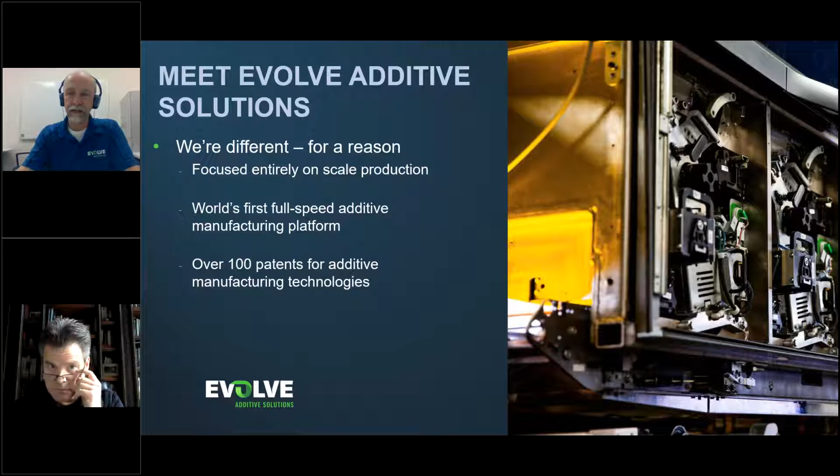So a little bit about where we are today. In 2017, we were founded when we completely spun off from Stratasys, and in 2018, we received a first round of funding and shipped our first alpha system. Today, we're on track to deliver production systems in the early 2021 timeframe, and we're taking orders today and looking towards the future for Industry 4.0 on our roadmap for factory integration. So we've really designed our roadmap and our systems around full-scale production.

So Jeff, any questions about Evolve at this time? Or... let me turn my mute button off.

So Andy, maybe you could share how mature the technology is at this juncture. Yeah, that's a great question, one we get asked quite a lot. Since we look like a 2-year-old startup, how could we have this kind of technology? It's actually getting to the core of the presentation. We'll go through some of that, but it's a very mature technology for a small startup.

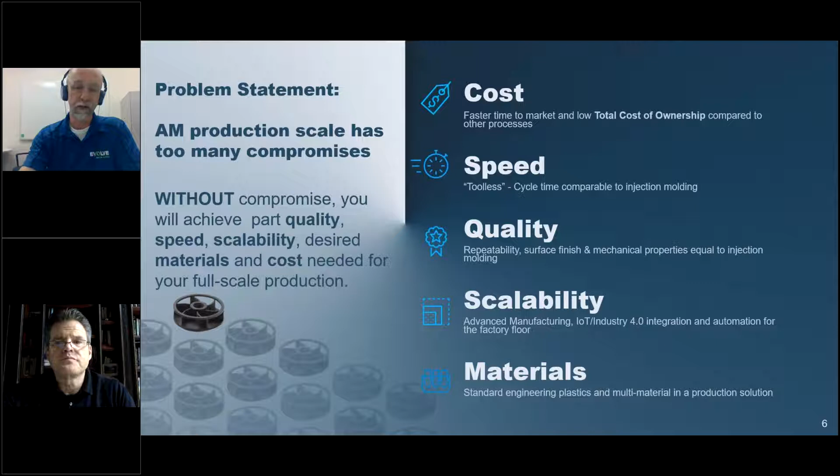As I mentioned before, we've really designed our process and system from the ground up, thinking about production. That's a key difference, and that really gets us to the SVP production platform, our solution with a ground-up design to overcome these compromises. It's the scalable volume production system, the Evolve SVP. We have a number of development systems, all leading to this final production system. I can say we can deliver mass customization, just-in-time production, and unmatched quality all at the same time. But it goes beyond the 5 key pillars that are core challenges to the additive manufacturing industry at production scale.

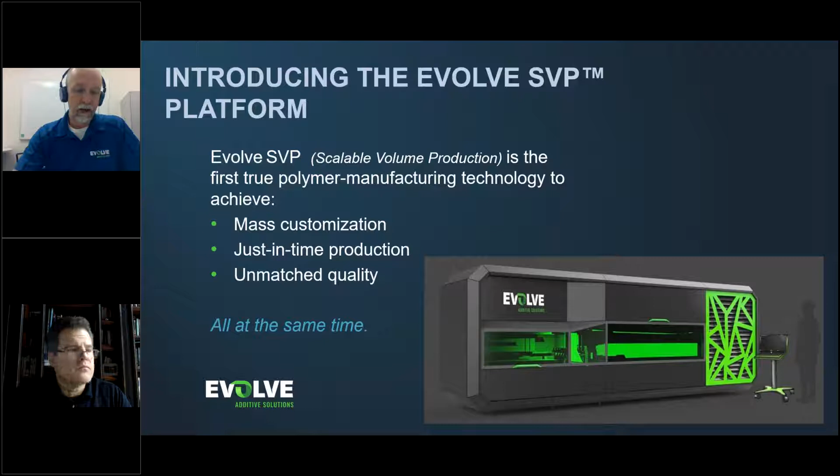So we're going to talk a little bit more about the additive technology STEP, and let's dive into that. In many cases, this is a process similar to injection molding on a small scale. What we've added is an electrophotographic process. STEP is selective thermoplastic electrophotographic process. We're taking technology that's been used for many years in a 2D production environment, and we've brought that into the additive manufacturing environment.

Really, our first challenge is to get you to forget all that you've seen about other additive technologies. When we're at trade shows discussing this technology, there are a lot of questions about whether it's a derivative, what is this? It's really a new process—not powder bed, not MJF, not SLA, not SLS, not a derivative of any existing additive technologies today. Many of you might have seen us at FormNext, and this was a big hurdle in understanding how we're different. We're not derivative, we are different.

STEP is selective thermoplastic electrophotographic process, as I mentioned. And the core of our technology is the electrophotographic imaging and deposition.

This is really well understood in the 2D printing industry for high volume printing, and we've adapted and added to that. We create a 2D slice of a part with part material, support, and maybe other materials all in one image layer. Then with heat, pressure, and cooling, fuse it all onto the build. This creates a fully dense part with isotropic properties in all directions.

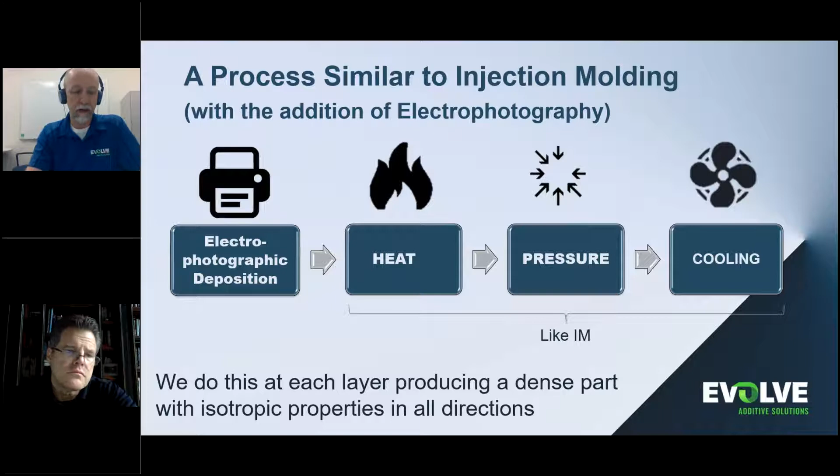There's really a good video that shows this. We had some trouble getting the video to run over the webinar today, so you can check it out at this Vimeo link. But we'll go through some of the key points of the process. I wanted to spend a few minutes on that.

Step one is the electrophotographic section, or the print engines that use our part and support toner. It's essentially a Kodak NexPress printer. So in a 2D high volume printing environment, we're using that in a modified version. 5 print engines allow us to create parts with up to 4 materials.

So you can think of, in the 2D process, you'd have cyan, magenta, yellow, black. In our process, we're taking toner materials that we've tonerized the material. You could think now you can print black, blue, ABS, PIBA, nylon. You print all of these as an image, all at the same time.

So we can do this where part and support are put down all at once. So that's an important point there too.

Andy, quick question — are you doing a layer of support and then build and then color, or maybe explain that process in a little more detail?

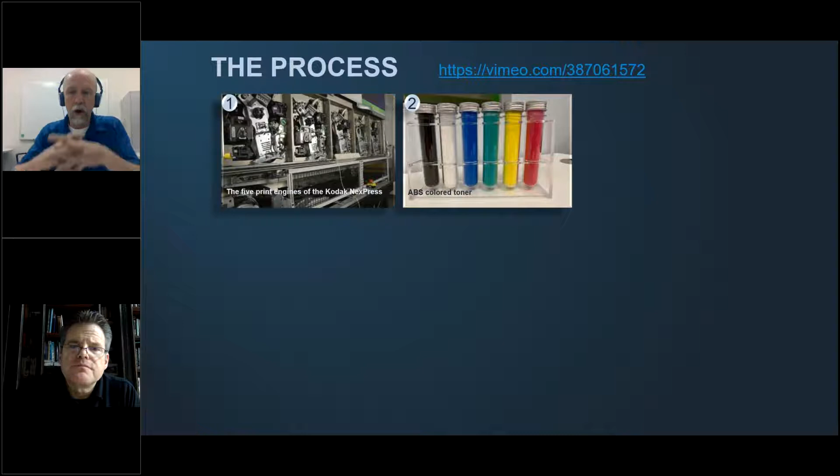Yeah, it's a really good point. So we're imaging all of the parts of the support and the material all at the same time. If you were to print a black and a blue part next to each other with support material, that's all going on one image, and then that image is transferred all at once.

So we'll get into that a little bit here. The slide or picture 2 here shows the materials that we developed.

We're working on different toners. We have ABS toner, we have some others, nylon, PIBA, and we're continually developing materials. It's a small particle toner, about 20 microns, which is actually bigger than the toner used in a printing process, which is on the 6 micron scale. So it's actually a little bit bigger and easier to use on the scale we're talking about for additive.

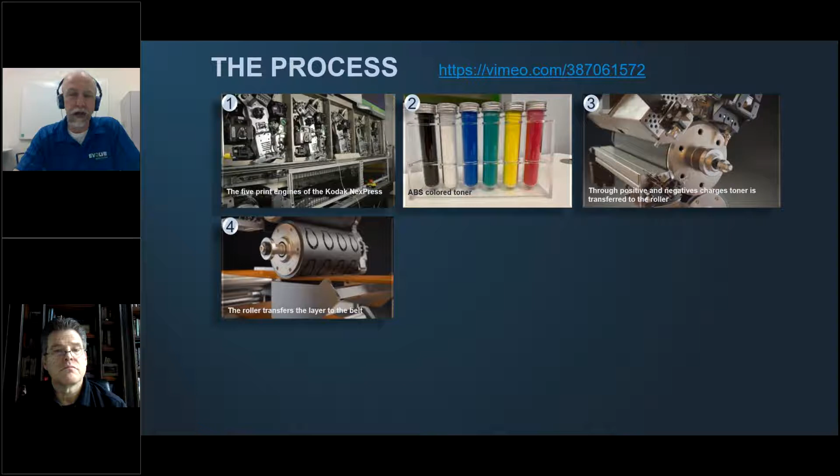Then if we get into 3, 4, and 5 here, we're taking an image from the electrophotographic process. It's being developed onto this roller we can see in 4, and then laid down onto a belt, using electrostatic charges to transfer this image to a continuous belt. This relies on precise closed loop control for alignment, placement, and thickness.

And we've conquered a lot of these challenges around aligning. A lot of this has been done in the 2D industry, controlling thickness on the layers. All of this has been overcome with our system.

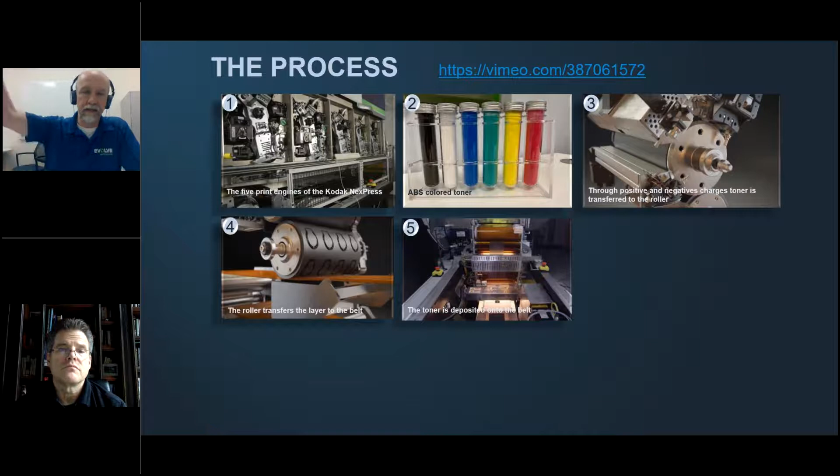And while that image is moved on the belt to the build area, it is heated, and the next slice is developed and put on the belt. So it's a continuous belt, a continuous process, and the slice is transferred to the belt where it's heated and transferred to the build plate.

We've had some questions about how robust electrophotography is for the production environment, and let me address that. There's more than 20 years of using the electrophotographic process in a 2D environment, and we have over 100 patents describing the developments needed to bring this to market. The parts we produce really attest to our capabilities.

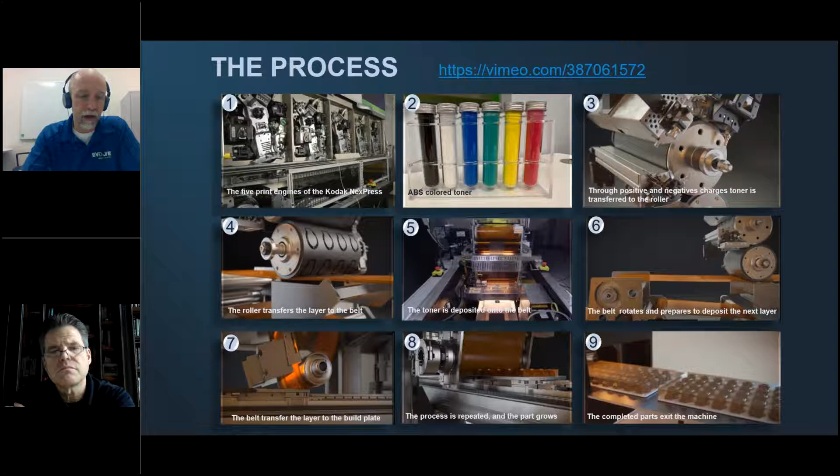So let's jump to our polling question. Do you feel that 3D printed parts can live up to the standards of injection molded parts? This might just be a general sense question, can they live up to injection molding on strength, on part finish, on quality, on material sets? You might take all those into account and see if you think they can live up to the injection molding standards.

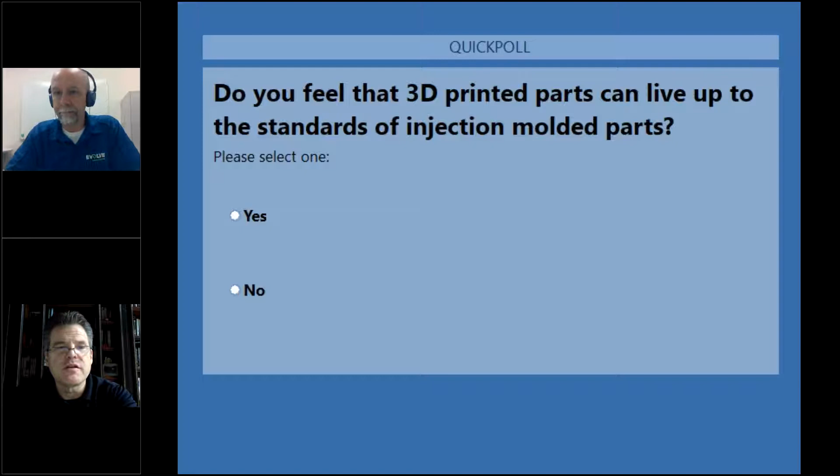Should have the results here momentarily. All right, great. I do encourage you to check out our website with the video, because that really shows where we're at with the technology. It looks pretty close here, yes and no for living up to the standards of injection molding. That's great, it shows there's some optimism that we can get there, but probably a little skepticism too. So I want to overcome some of that and talk about the parts we can produce today.

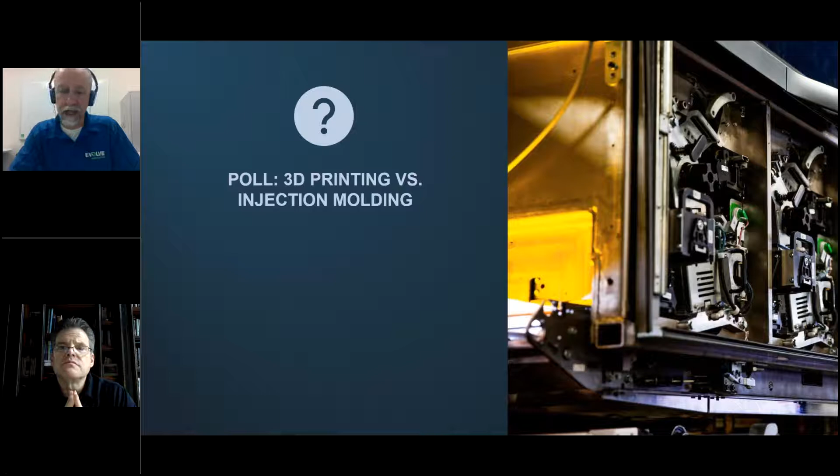I think the point is that Evolve has proven our STEP technology, and we really can produce parts that are on par with injection molded parts. We'll get into that a little bit right now.

Under our applications development, we have created some really amazing parts, and people are pretty much blown away by our as-printed surface quality. I'll talk a little more about this as we go through it, but we have produced parts with multicolor, multi-material, and parts that are really well suited for plating.

We can do shell and core. We can control custom blends at the voxel level, and I'll show that on our next slide.

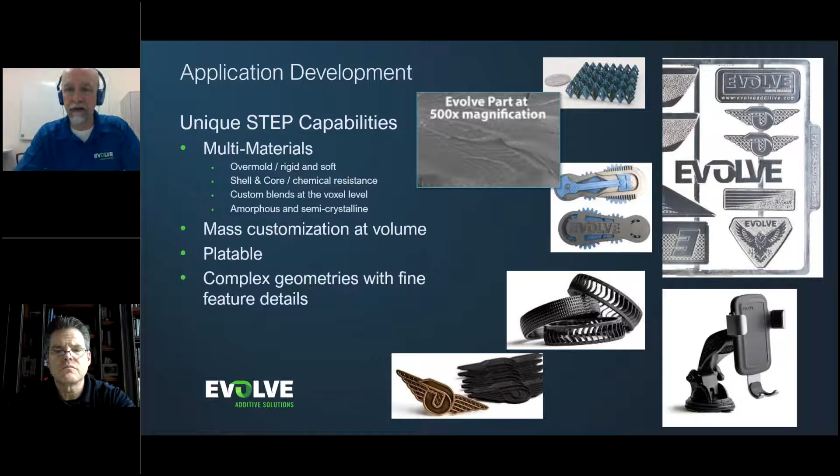So no unintentional voids, making these parts excellent for pneumatic applications or parts that need to be sterilized. Actually, these little wheel gears here, in the center below the black and blue part, we've also printed with Evolve. These are about the size of a fifty cent coin. We've printed Evolve on the insides of those spokes. It's a little hard to see in these pictures, but here's some other examples.

Really getting into the multi-materials of ABS and showing some different colors. You can see the scale of the dial here. Let's see if I can play a video to show the animation of it turning. We made a smaller incremented dial. We've made a pen where we put the ink cartridge and the spring in to show that we can do some fine resolution. We have Evolve printed on the clip there.

So you can really see some of the finish here.

The part on the left is shown just as support removal was done. So we've washed away the support, and we haven't done any bead blasting or vapor smoothing, so you get a very high surface quality finish.

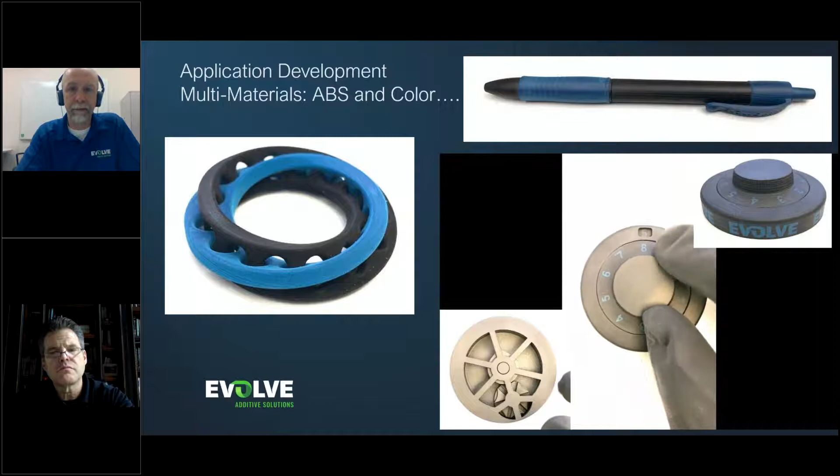And then we've also done some multi-materials, combining materials in one print. The real important takeaway about the parts we're printing is that we can create fully functional toggle type parts with PEBA as the spring

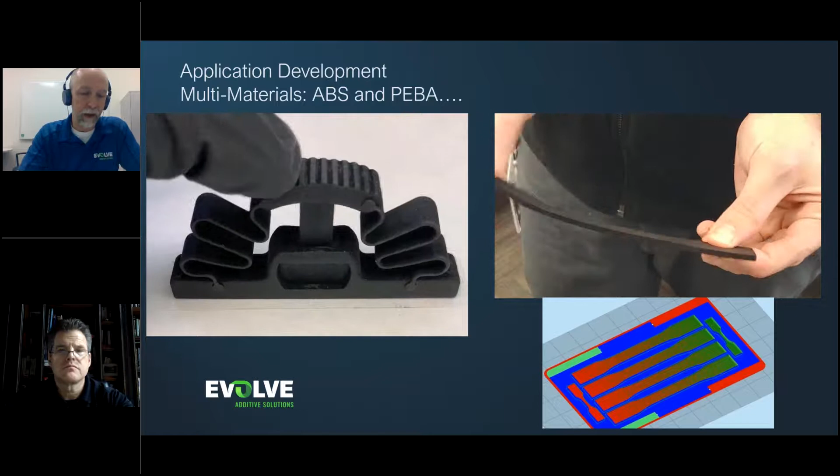and ABS as the lever and the base. We also have voxel level control and printed a fully dense gradient part of ABS blending to PEBA. This could be used for applications like a whip antenna with a solid base transitioning to a flexible housing.

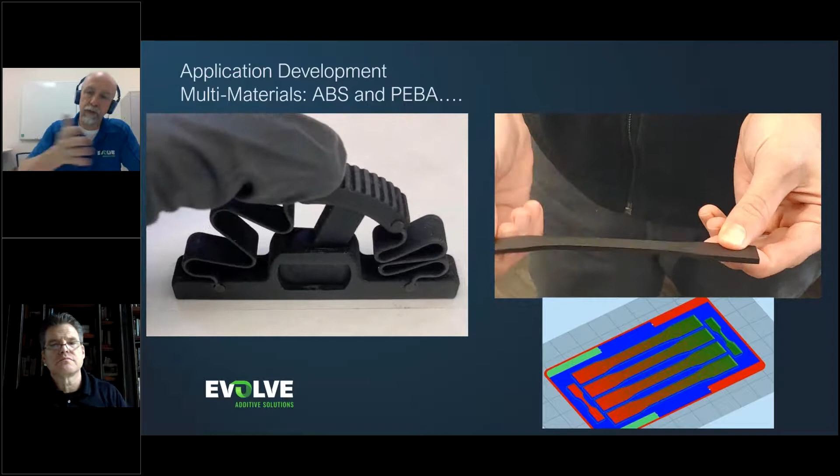This is really a unique capability to engineer completely new properties by controlling the placement of materials on that voxel level. That dog bone you see on the right, that's a gradient, and we've shown the CAD below - we just put the voxel gradient in from ABS to PEBA. You could really engineer any kind of structure you wanted with multiple materials.

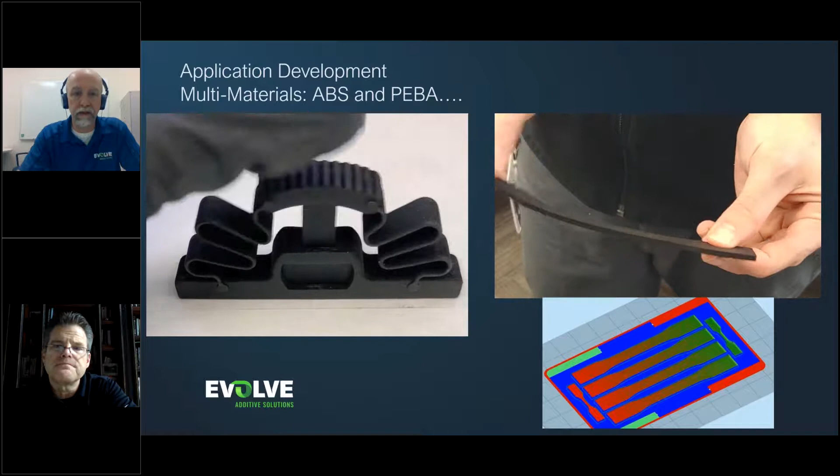So these were all done as single prints. We're really proud of the materials and parts that we've printed. It's really pretty amazing, and that's what blows people away.

So we wanted to talk about a few of the other areas where we're different as a total solution from others. Support is a basic water solution, and this is where support removal equipment like post-process comes in. So while we say no post-processing, we're really differentiating between support removal and part surface finishing.

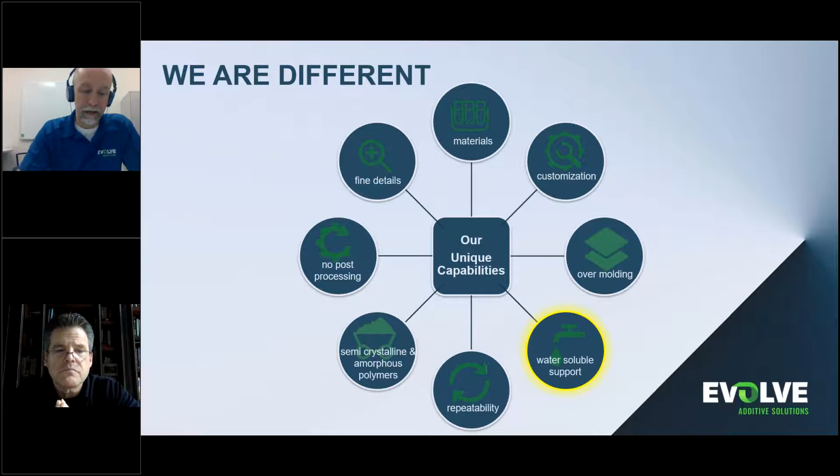Meaning while you can bead blast or vapor smooth parts if you need to, in a great many applications it's really not needed. So to clarify, support removal is still needed, and this is where systems like post-process come in to wash away the support and dissolve it.

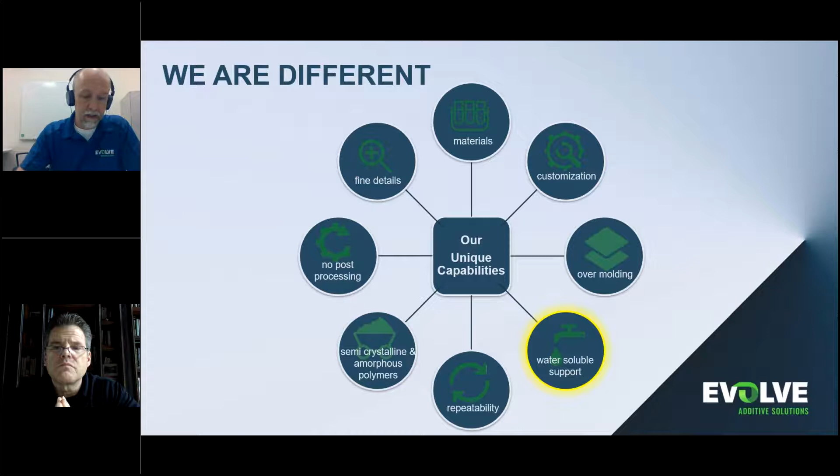And we need capabilities that are at these high volumes for part creation. There's other qualities that differentiate us that I spoke about in the slide before. We want to get - I see we're running down on time - and we want to leave some question time here. But where does the future lead?

There's been a lot of talk about Industry 4.0 and what we're actively planning for this. Our product roadmap incorporates much of the thought leadership of integrating into an automated factory environment. Not a lot of manufacturing enterprises really have a full Industry 4.0 plan - less than 15% do. This is really that entire integration.

So when we say we think production from the ground up for Evolve, we're really thinking about how all of this fits together into a high-level production environment. This really brings us to our future vision of where an Evolve step printer would fit into an industry environment.

So long-term vision, an Evolve system is integrated into a true automated production line that can include support removal, paint, plating, embedding electronics, and more. This vision to integrate into the workflow is really key to unlocking additive manufacturing's potential and to fully realize this value in production.

And I think we've got another question here, just to get a sense - has your organization really considered looking at additive manufacturing for the production of plastic parts? So really around this question, is it something you've been thinking about, some way you might really integrate that into your production environment?

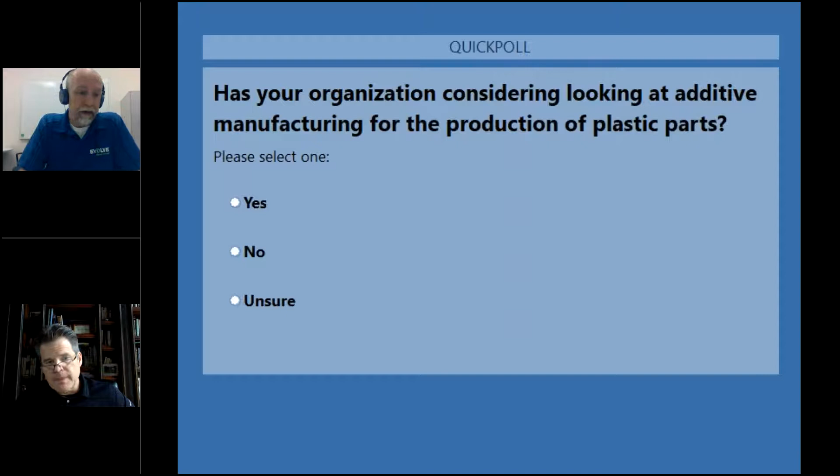Yeah, that's great - we've had a lot of interest and inquiries and printed some parts for things like ventilators and other devices, and it's really been interesting. I've been on a lot of webinars lately that have talked about how to really onshore and have this scalable demand for higher volume production parts, not just prototyping. It's not to say you can't use our system for prototyping - you could prototype really rapidly and move straight into production.

So it looks like everybody pretty much says yes, that we're thinking about additive production scale kinds of parts. So that's really great to hear.